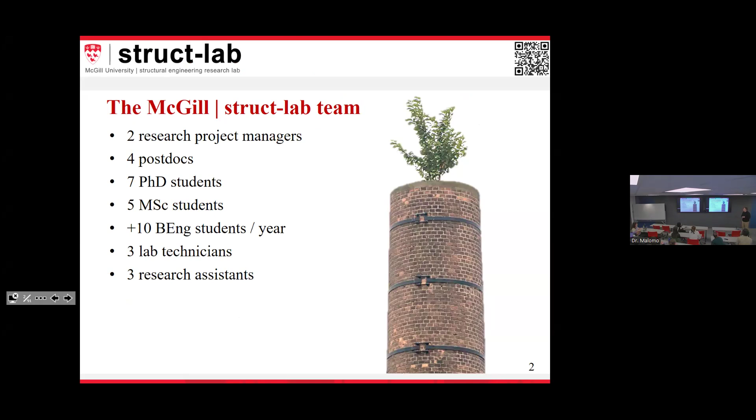Now it does work. So we're a big lab, a big team. There are a number of postdocs and PhD students that help me out. We are right there in Macdonald Engineering. It's quite a big lab. And we do a lot of things that are very practical, so mostly experimental. We do some numerical things. And really most of our research revolves, well, as my students say, we have asked money to everyone. And so our projects are pretty expensive, very applied, if you want.

And what we do essentially is we work a lot on existing buildings and on climate change adapted solutions for designing new ones. My philosophy is always, if you build a building today, tomorrow it is an existing building. So it's really a problem that relates back to preservation engineering, as I would like to call it. We are focusing on different materials from a structural engineering viewpoint: masonry, concrete, timber, steel, you name it. Our specialization is mostly masonry, and Montreal in general is great for that. I'm European, I'm from Italy originally, so masonry has always been my main interest. And Eastern Canada, we'll see, is an interesting place for that.

We do a bunch of tests, mechanical, environmental. The main goal is to try and preserve buildings that already exist, to reuse them, and we will go through a few numbers, that is one way of making them sustainable as well. It's a big word, but still. So building preservation, reuse, and climate adaptation are the keywords of this presentation.

I will go through a little bit of background because most of you are maybe not familiar with the terms and things that we do. And I would like to make the link with climate change and sustainability as well, which is not that obvious if you're not in the field. And then I'll show you a few projects with a few destructions, explosions, and cracks, I promise. So in the main domain of structural engineering, we also do seismic, which is a subfield. So anything that pertains to repair and retrofit is of interest to us.

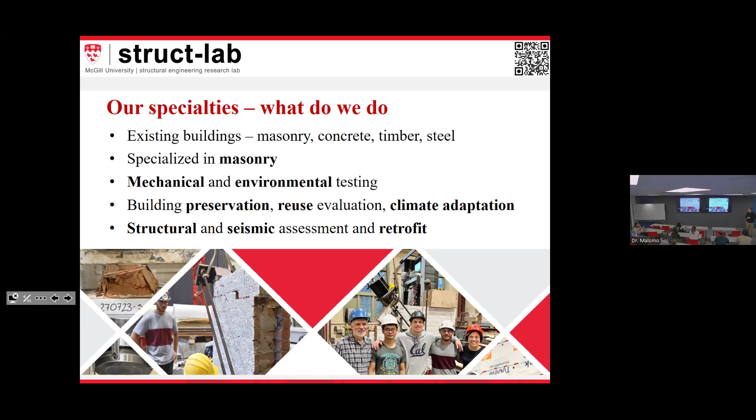So just a few figures. I mean, you're much more expert than I am in terms of statistics and numbers like this. Usually we say that 40% of the GHG emissions are due to the built environment, or at least related to construction. In Canada, we have a problem with climate change. I'm not the first one to tell you that for sure. But in general, from my perspective, it's the warmer temperatures and the altered rainfall that cause most of the issues that I'm trying to address. And of course, when you jump from snow to water, then you have all sorts of problems in buildings.

And in general, this leads to certain consequences for the built environment, in the sense that you have a building that deteriorates faster because initially it has been built for addressing different environmental conditions. So climate changes, but then buildings change as well, and it's not always a good match. And in general, the built environment is one of the most critical sectors for climate change. That's for sure, and it's going to cost a lot of money in the next few years.

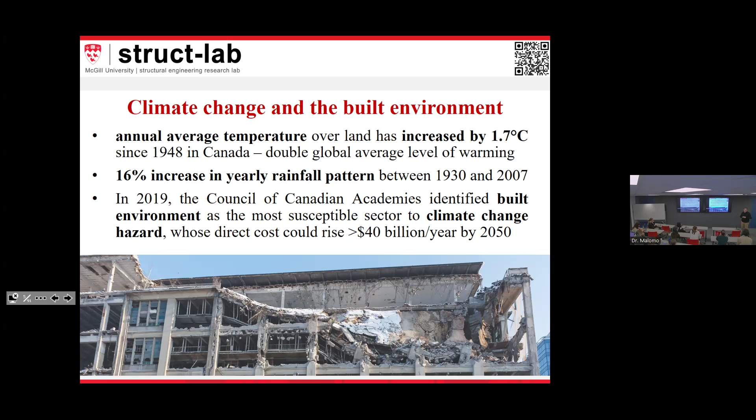Anyway, this is some of the background, and we have mentioned some of the issues. People in governments and groups try to address those issues sometimes as fast as possible, which is not always the best thing to do. So you may have heard and you may have seen in Montreal as well a lot of mass timber, a lot of solutions, prefabrication. I have my own ideas on that, and I'll share those with you later.

But in general, just to give you a few examples, the National Building Code of Canada, especially the one that is focused on energy, is increasingly setting higher standards for sustainability, which is good. Don't get me wrong, but if it's rushed as a response, you risk finding yourself using what are called advanced materials, so very expensive, very hard to fabricate, very costly, and seldom affordable as a solution.

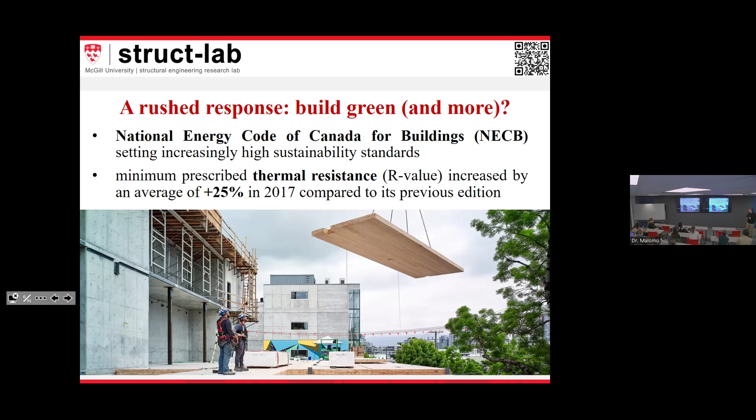An example, again, on very practical stuff. If you look at the national housing strategy, which has been released right before Trudeau ended his mandate. This is very fresh, 2025, really. So we all know that we have a housing problem. And the one main problem in terms of housing is that we need to build more. At least this is one of the solutions that is out there. Nothing in the strategy that has been presented addresses building reuse, and that was very concerning to me.

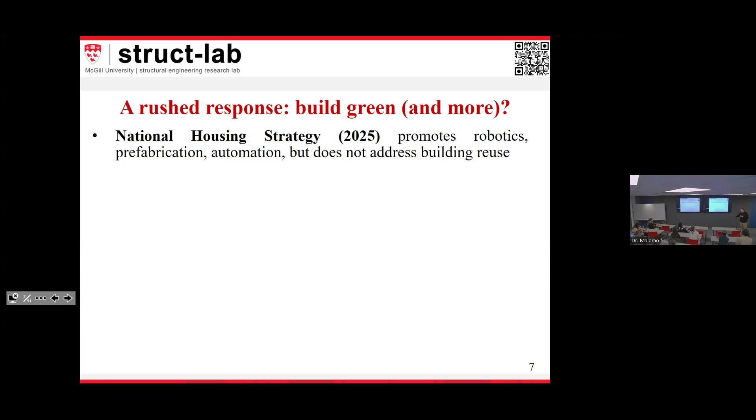But if you look at the solutions, the rushed response that has been put out there, one of the main key points was to use prefabricated homes, so homes that are easy to fabricate, modular, and so on and so forth. This is not really new, so it's history that goes in circles. So whenever you have a rushed response to try and build green, then you may end up with problems. That's my thought on that.

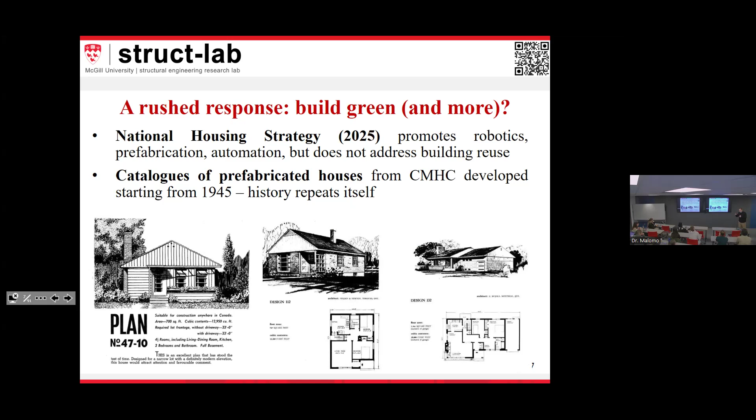And if you look at this drawing, this is 1940 or something. CMHC, Canada Mortgage and Housing Corporation, came up with these solutions 70 years ago. So it seems like we're going in circles. At least in my sector, this is the feeling that I have. Whenever you look at building reuse, it's going to take a little more time. But in the long term, you're going to get it back. You're going to be more towards carbon, I wouldn't say carbon neutral, but definitely carbon conscious.

In general, I like to think about existing, something that is already there, as the greenest solution ever. And it's not just me; the data back that up. This is a famous line from Carl Elefante, an architect, a few years ago. And that is why we're so interested in this. These buildings that are already there, they've been winning the challenges of time. So there must be a reason why they're still standing, right?

Truth is, it's not so simple to try and refurbish them, renovate them, and reuse. Most of them, especially seismically, are not necessarily up to code. So that's definitely a problem. So to me, there is always a conflict. As an engineer, as a preservation engineer, I would like to keep them. And this is what we do as researchers, to try and bridge the gap. But there are problems, issues, and barriers to that.

Changing climate changes buildings. Of course, you need to put things up to code and adapt continuously to the local climate that you have. And then there's this major barrier. The National Building Code is what governs the way we build. And if you change the use of a given building, or if you do a major renovation, this building needs to perform like a new one. Okay, so that is one major barrier.

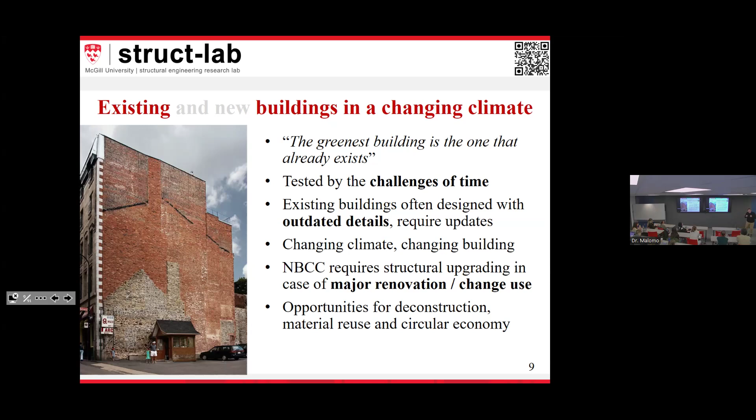or deconstruct. You might not know, but bricks nowadays, and we have a lot in Montreal and in Eastern Canada, whenever they're deconstructed, either go in the landfill or are crushed, and we make tennis courts with that color. There are not a lot of tennis courts around, so most of those go into the landfill. So some of our work looks at reusing this material and trying to decrease our carbon footprint.

Everything that we do needs to be affordable, otherwise nobody will use it. And that is one of my main arguments, right? If you want to have an impact, and you want to have it sooner rather than later, you need to make something that people can actually use. Otherwise everyone could use aerogel or whatever, very high performance, high cost things to improve building performance.

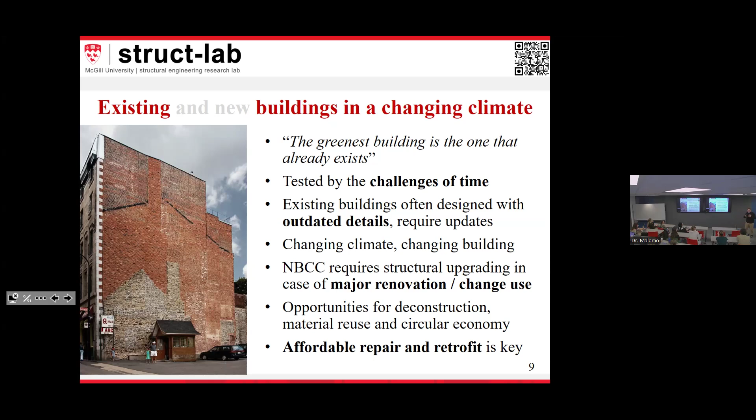For new buildings, and this is the other part of our research, of course, you need to design for the climate that you have locally. A solution that performs very well in Europe might not perform at all here in Quebec or in other regions, right? So every approach needs to be local enough. And if that's something we believe in, we need to understand the environmental context, but also what kind of materials are available here. Timber here is different from timber on the West Coast, for sure.

So again, we need to adapt to the local climate. One of the things we will see together in this presentation is that insulation, especially passive insulation, is, at least from our perspective, the key. We'll see why, but in general, use low cost ways to augment the thermal performance of your building. Whenever you have a local context, using local materials will decrease your carbon footprint dramatically, right? And there are ways of doing that, and we're not even talking about crazy things. So there are ways of building locally,

right? So low cost versus advanced. That's the battle that I'm conducting. Low cost means that your solution needs to be engineered, needs to be tested, and it's a longer process. Advanced is easier because you're generally using higher performance material. It's unfortunately not very affordable. Construct to deconstruct, that is another thing we're looking at. Whenever you're constructing a new building, you need to realize that one day that building will need to be deconstructed.

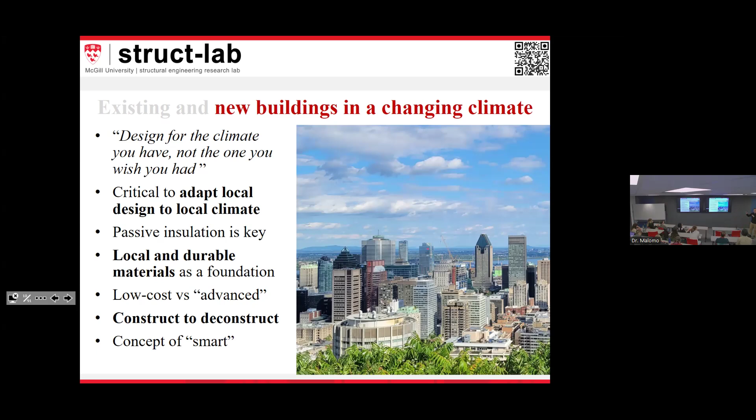Our research is based on things that are a little bit more traditional, and this is my dilemma as a structural engineer. If you think about a building that already exists, and you would like to keep it or adapt it to climate change and to new natural or man-made hazards, there is always this dichotomy, this duality; it's really an internal struggle. If I want to extend the lifespan of my building, it's great from a lot of perspectives, but essentially, from my perspective, I'm increasing its lifespan. Hence, I'm increasing its risk of being exposed to threats.

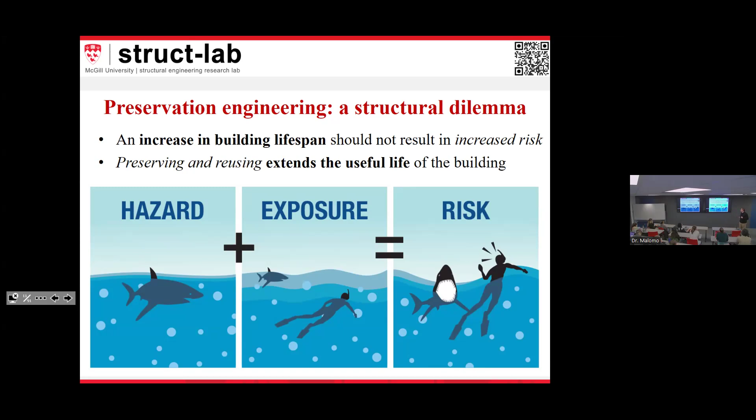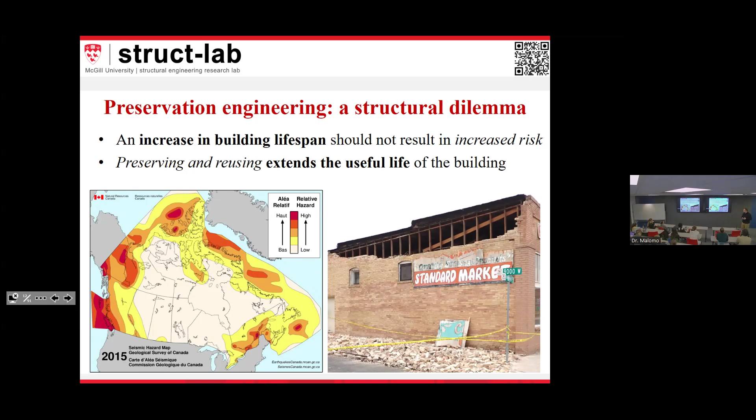Right, so an existing building undergoing major renovations must perform as a new one, which is one of the current barriers to climate change adaptation and preservation. Most of our norms, everything that pertains to provincial codes or national building codes, are conceived for new buildings. There are about 12 pages in the National Building Code on existing buildings, so there is very little. There is a lack of engineering guidelines: there are none in Canada. There are guidelines in the US, in Europe and in other countries, but those buildings are different from ours, right? So part of our research is to foster collaboration with industry and get those standards done for our buildings right here, with our climate.

And the same applies to building adaptation. We have been talking about the lifespan of a building, 50 years, 100 years, and so on. There is the perception that materials are durable to infinity, that they will never perish. They will. And so maintenance is another very important thing. Most of our engineers, even if they will never admit it, have very little knowledge of what's going on in existing buildings. There is a lack of knowledge in terms of the materials themselves and how they would behave.

Most of our engineers rely on material testing data obtained in Europe, in New Zealand, in the US. So it's different, and our assessment is flawed. They end up using very conservative values for those assessments. The more conservative your structural assessment, the more material you will use for retrofitting, right? I'll talk about knowledge factors later on, but that's what it is.

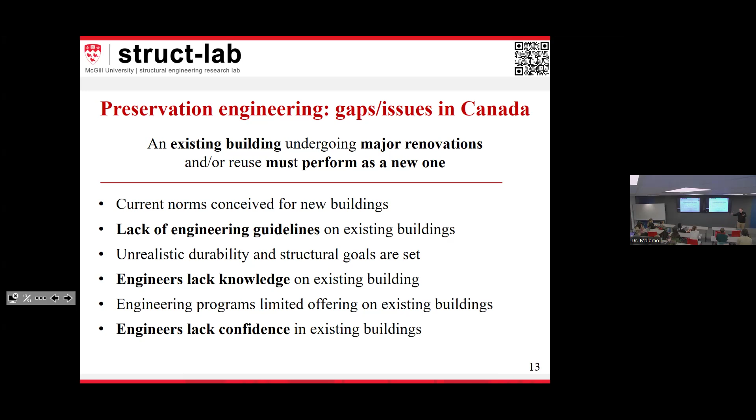When engineers lack confidence, they end up overshooting and over-designing. So it always gets back to the knowledge factor. The less we know, the more we are scared, and the more we over-design things. The more we over-design, the more material we end up using, the more demolitions we're going to perform. And this is more or less what happens.

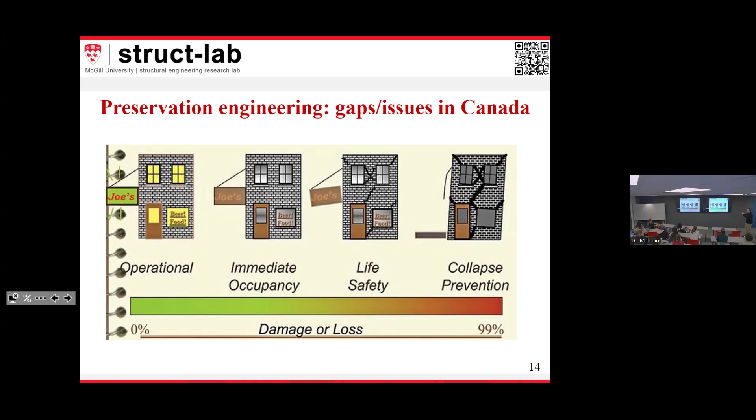I'll give you a few examples. But this is how a structural engineering mind works, and this is what I like about US guidelines for existing buildings. Whenever we design a building, we know the materials that we're using, but if you encounter an existing one, you don't know what's going on. If you don't do testing, if you don't know your construction details, you need to overshoot your design. For instance, if you don't do testing, you need to decrease the mechanical properties of that specific material by 25%. So the less you know, the more you'll overshoot, and the more material and more carbon footprint you'll have.

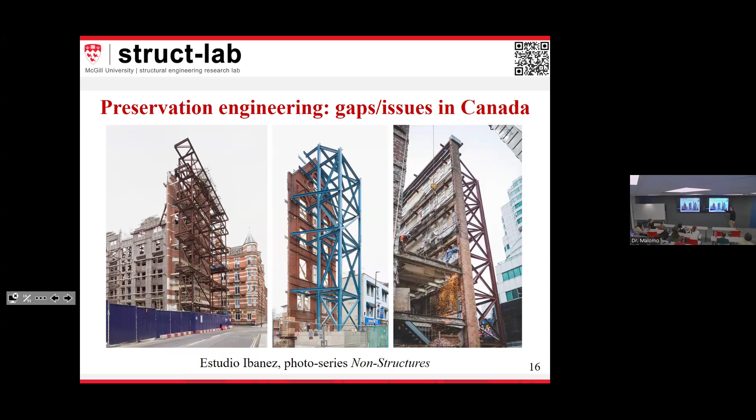Another example in Montreal, again in the Plateau area, between Saint-Denis and Mont-Royal. This is 2018, and I lived right across the street, so I made some of these photos, and this was a really interesting case study for me. This is a typical triplex in Montreal: stone outside, wood inside, very typical. There was a commercial place here, and residential on the upper stories. In these 3 years, nothing really changed, apart from the fact that this commercial shop was closed.

And so they decided to renovate the place, or at least change its use, probably because the shop had closed. What they did, you will see, is they demolished everything that was inside and just left the shell. That was because the city of Montreal really dictates to maintain the facade. So then there is another question.

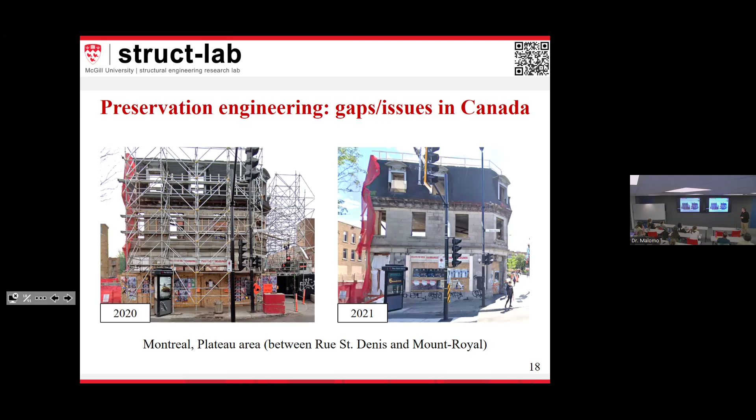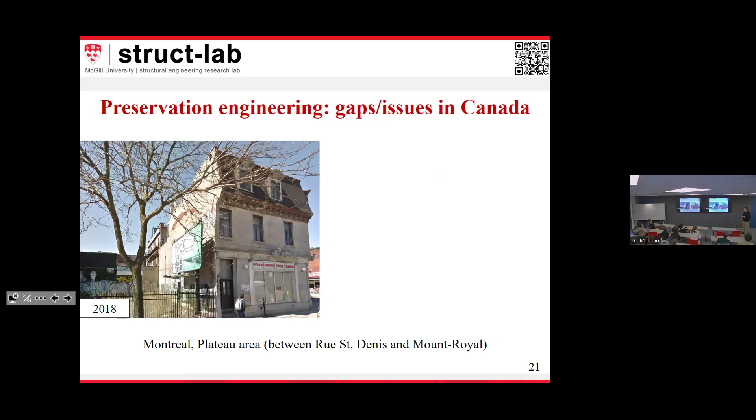So I'll show you what's going on inside, right? And this is a surprise if you don't know what's going on. So this was the previous state, nice masonry walls and so on and so forth. And they demolished everything inside. This is one side of it. Other side, same thing, right? There was really just the shell outside. But then they came up with this system, which was basically a reinforced concrete building inside the old building.

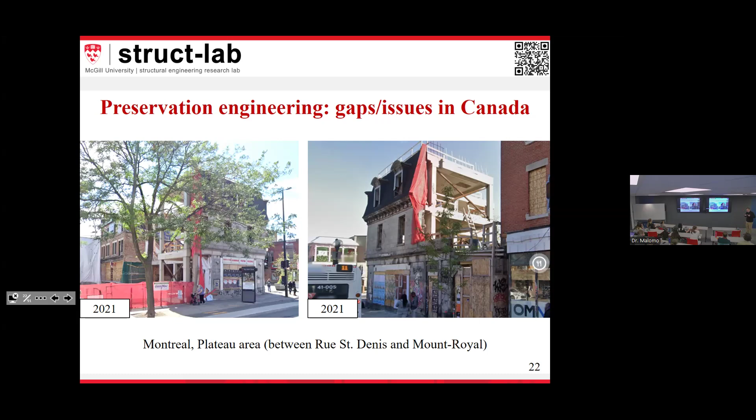So this to me is a clear demonstration of an engineer or an architect who has designed this. They didn't trust the original system, the original floors, the original columns, the original posts. So they didn't know really what was going on, and so they decided to just get rid of it and build new, right? Lack of knowledge. This is one of the main reasons why this happens. And it happens a lot. And there's a lot of discussion on how to address this, not only in Canada. Globally, this is a big problem.

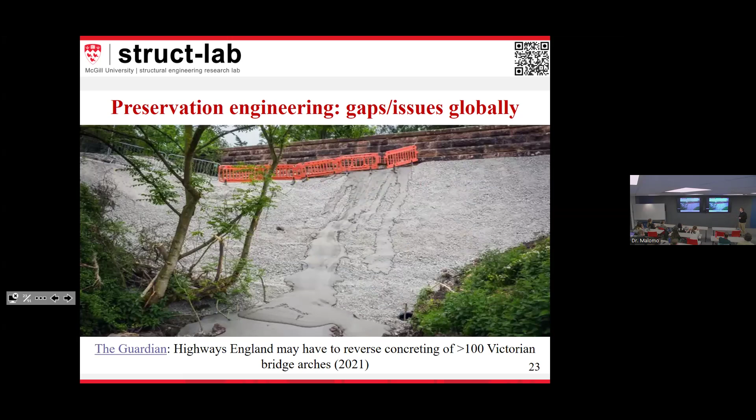This is something that makes me laugh a lot. I mean, it's a little bit sad, but still. Imagine you're intervening on hundreds of bridges. This is in the UK with concrete, right? And then you had to reverse the intervention. So imagine how much material you have wasted, and imagine how much time you have wasted. Lots of money. So this is just an example, but there are others.

So if you look at what's going on in Montreal or in Canada, Eastern Canada is very special. We live in Montreal, so we know that our buildings oftentimes are older than others, especially in other regions. If you look at our building stock, Quebec, Ontario, where most of the population is nationally, 60% of those have been built before 1980, which means that most of them are reaching their nominal lifespan, right? So we have quite an old building stock. Most of those are residential.

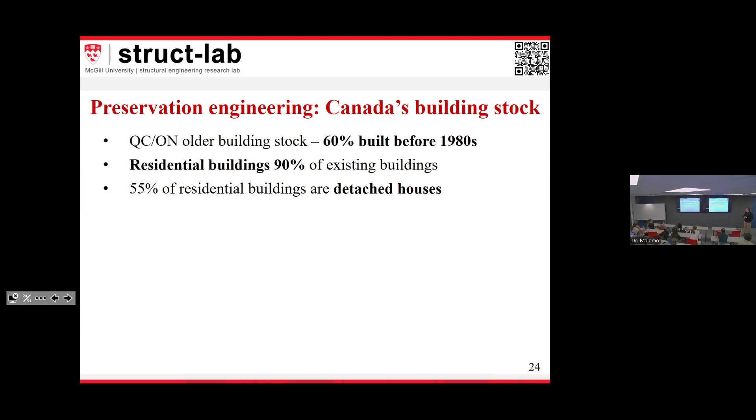So most of those are residential, and we will see that thermal efficiency is going to be a big problem sustainability-wise, and even from a climate change adaptation standpoint. Most of those are detached houses. We want space, and that is why most of our houses are detached houses. And most of those have materials that we thought were invincible.

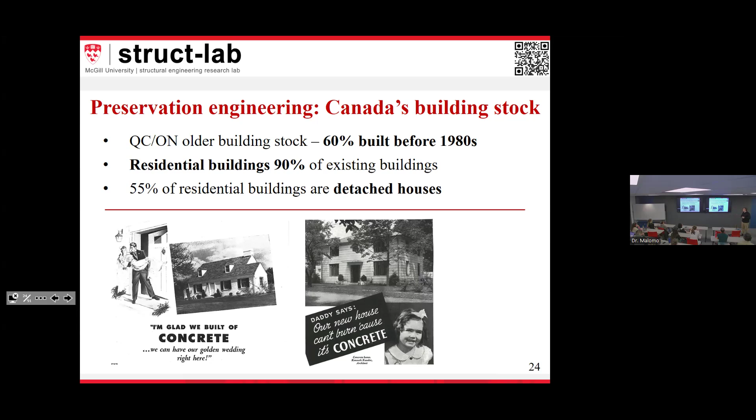So these are some advertisements for concrete, right? We thought the concrete would last forever. Instead, unfortunately, the rebars corrode, cracking happens. And so unfortunately, all our foundations will crack at some point. And other things pertaining to the Canadian building stock, just a few figures.

So in general, if you look at residential buildings, space heating is the one that has the largest amount of GHG emissions. So that is really one of the problems. That is why I said before, passive insulation from a climate change sustainability perspective is key. And since that's the key, you would like your envelope not to crack, or at least to crack the least, so everything is tied, mechanical damage to thermal efficiency.

So in general, whenever you want to start and reuse a building, there are a lot of challenges. We've mentioned some of those. The way we think about reusing and making an impact in the next, say, 10 to 20 years, because we don't have a lot of time, right? Most of our agencies would like to have high-risk research being performed, fine. But if you want to make an impact at the regional scale, you need to identify clusters of buildings that will give you the better gain in the shortest period.

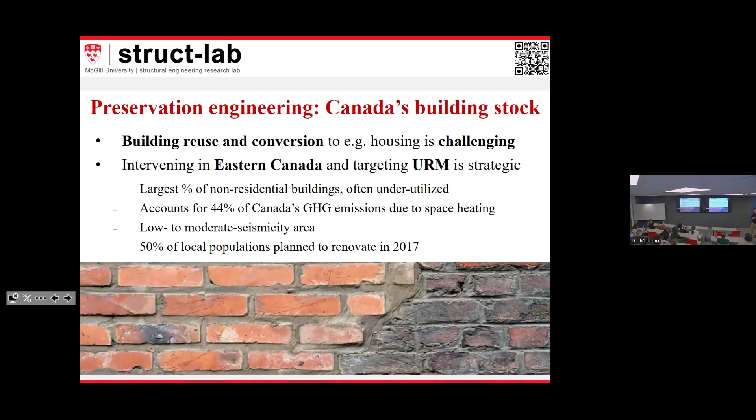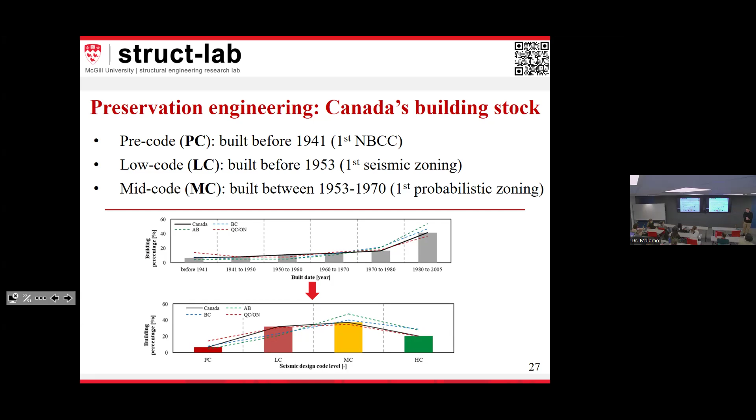Modern. All those other buildings, pre-code, low code, are buildings that may have problems if a natural hazard, in this case earthquakes, comes. So there is quite a lot of that. And if you look at these trend lines, Quebec and Ontario are struggling a bit; of course, they have the older building stock. So it's a localized problem in certain regions. My philosophy is you try to address that first for high impact in a shorter time span.

So this is us having fun in buildings. Of course, you want to start with gathering the knowledge. And in Eastern Canada, or in Canada in general, virtually nothing is being done. We don't know our masonry, how it performs. We don't know our timber, what its properties are. We take everything from abroad, most of it.

So what we do, me and my research group, we literally go into buildings and take samples out. We bring those to our lab and we try to characterize them environmentally, meaning the thermal properties, the porosity, all those properties that link back to their environmental performance, and also structurally, how much load they can take in all directions, and so on. Here I'm showing masonry, but we also have some cool stuff about timber.

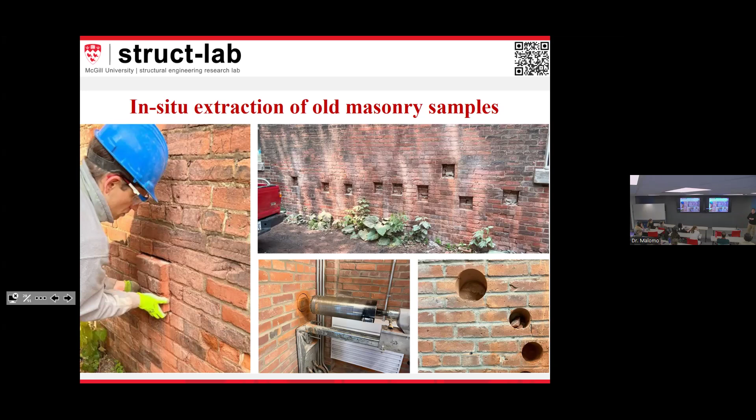These are all buildings owned by the city of Montreal, and they're very proactive and supportive in letting us access those buildings, which is great. The beauty of focusing on Montreal is that it has historically been a port of entry for most of our construction materials, initially from the UK and Europe in general. Most of the stones and bricks, if not produced here, came from those countries, and most of the material in Eastern Canada originally came through here. So if you start here, you have a good overview of what's going on.

So I was saying we crush stuff, we destroy stuff. We start from very small things, and by the way, you will probably know some of the buildings these samples have been taken from. Compressive testing: this is mortar, this is stone, and these are masonry assemblies. We call them triplets because there are 3 bricks. So this is the knowledge phase, gathering knowledge of these materials. We also do a lot of freeze and thaw damage testing.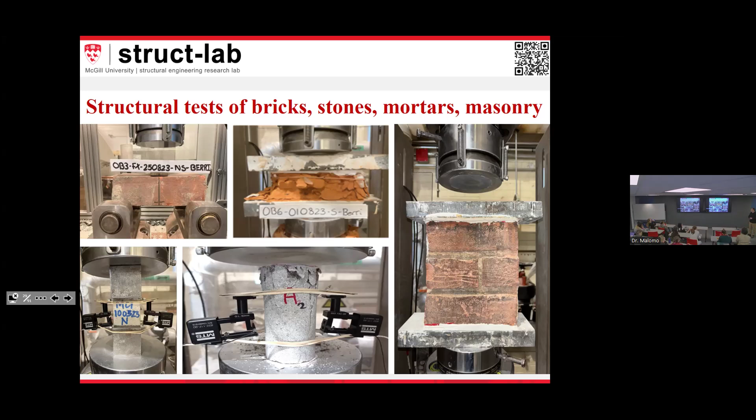We leave them there, and then we perform 50 cycles of freeze and thaw, which if you think about the lifespan of this brick is nothing. Imagine how many freeze and thaw they have. But being saturated, being full of water, you test them. It's super harsh as a test. So if you look at this standard, it's written explicitly, do not use for used bricks.

But there are no other standards for used bricks, right? So this is a big barrier for deconstruction, reuse, and so on and so forth. This brick will hardly pulverize like this because when it's in a wall, only the face, the outer shell, is actually wet. So this is one barrier.

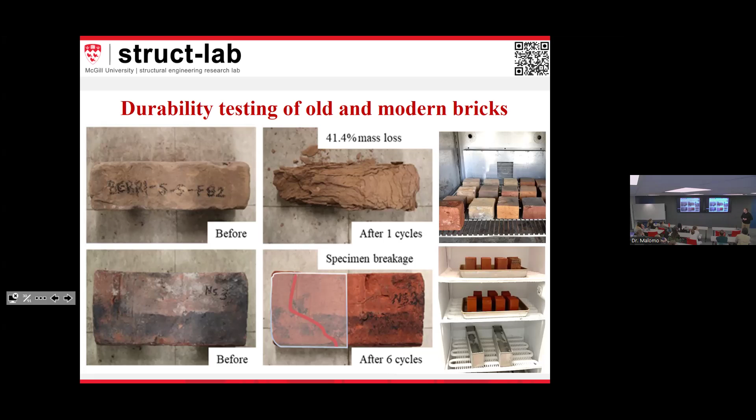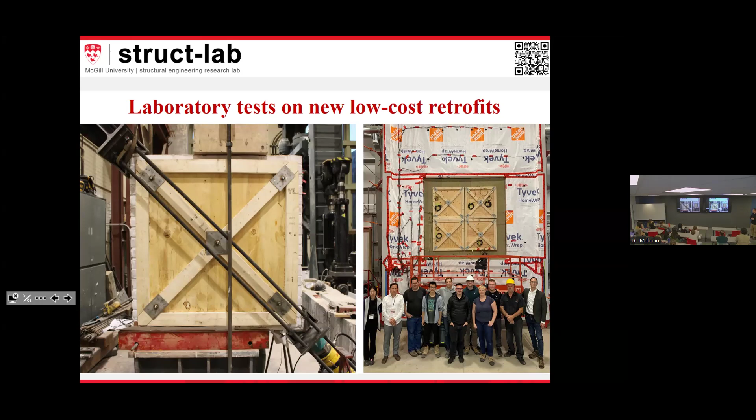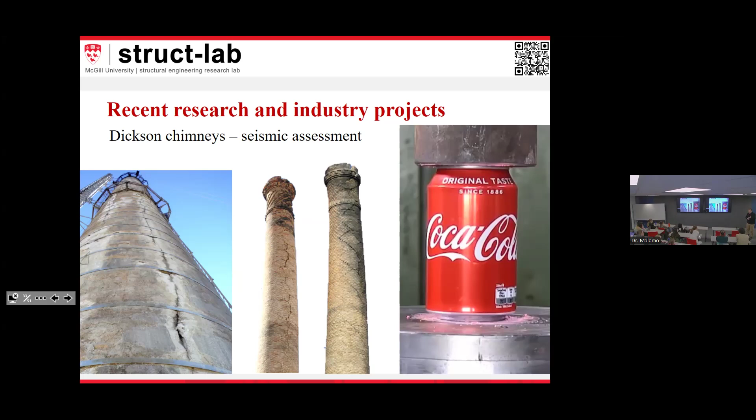So we have been working with the city to find solutions for this. What we've been finding out is that seismically, this seemed to be in pretty good shape, notwithstanding the crack. And you learn that by being on site and by doing your analysis and so on and so forth. It was a lot of fun. And we're collaborating very well with the city.

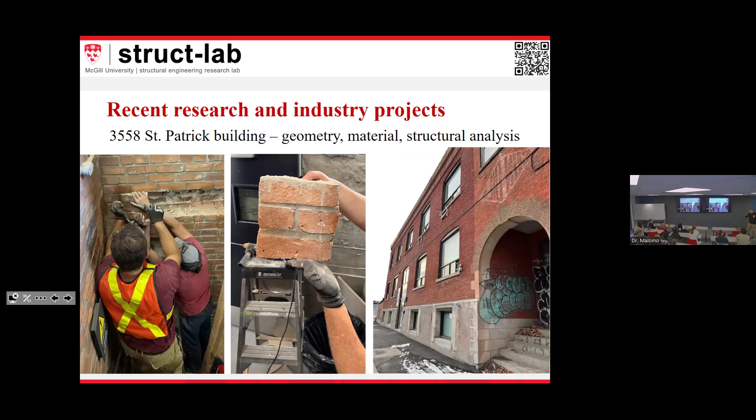This is another city-owned building in Rue St. Patrick. This is presently used for storing the vehicles that remove snow. There is a group of people that manage those. So we went there. We're trying to extract samples, got the full point cloud of the building, and try to understand what the geometry was, and test them in our lab, right? So a lot of samples.

Sometimes I feel like Indiana Jones. You go on site, you take a lot of samples, and it's a lot of fun. But it's super important because these data don't exist, and if they don't exist, whenever you assess a building, it's very difficult to proceed. And this also pertains to the new buildings. Now, whenever you build, for instance, an extension of an existing building, you really need to make sure that the material that you're using is compatible with the old one, right?

Otherwise, if you end up being too stiff, or less durable, then you have something that is not compatible. Something will crack here and there. So if you don't know what's going on with the older building, hardly can you manage to have buildings that are adapting to the changing climate and to the changing world we live in. Right? Example of things that have crushed. Surprisingly, these assemblies did perform very well, even though this is a 1914 building, right?

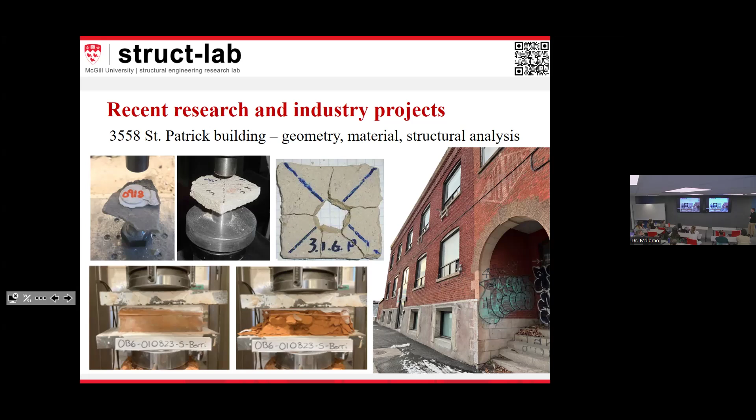And we do this with everything, with mortar. This is just bricks and mortar, but there is more, timber and so on and so forth. And then when you study these buildings that are right there, the beauty of it is that you can sort of get the geometry, get the characterization, and reconstruct the samples in your lab, right? Which is what we're doing right now in the Jamieson Structures lab. This is a 3 meter by 2.5 meter wall, so it's actually very big, right? And we've had masons from the city coming into our lab and constructing them.

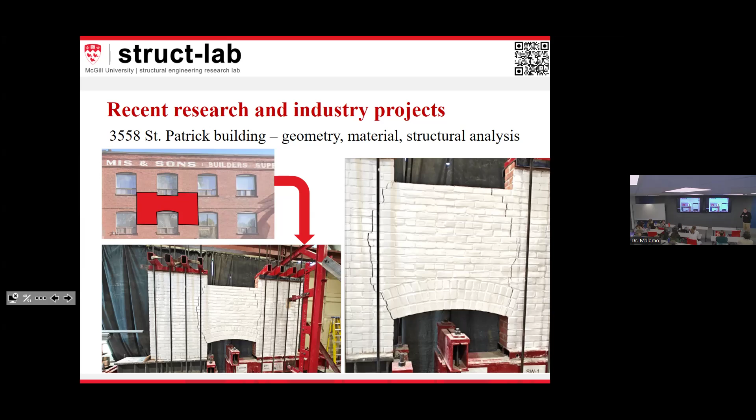So we had to select bricks that were compatible with the existing one, mortar that was compatible with the existing one. We needed to add to the mortar almost 20% of sand to make it weaker, and it was still much stronger than the existing one. I'll show you a few things. That's another problem. Modern materials, they're too strong for the older ones. So compatibility is always an issue. Right? So these are some of the walls, and it's basically this portion of the building that we are replicating. And we have many of those. So it's a big effort, and everything revolves around the knowledge.

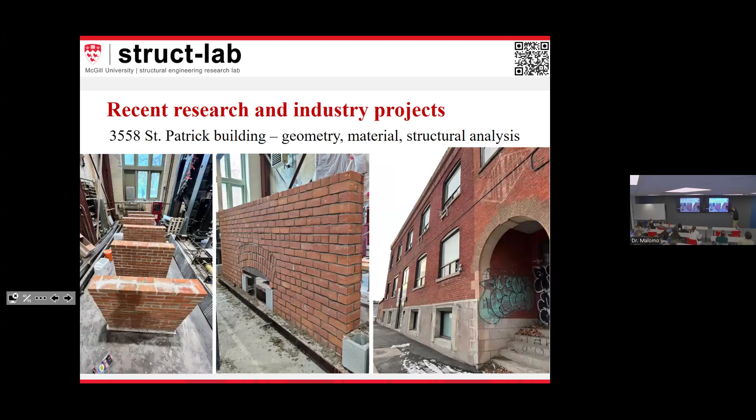We're now doing this with the big walls to try and understand what would be the pattern of damage that you would get from a settlement in Montreal. It's important because if you crack the envelope, then thermally this building becomes inefficient. But it's better if you know what kind of damage you do expect from these actions.

Other examples, you might know this building. This is right under the Jacques Cartier Bridge. It's a pumping station. It's called the Craig Pumping Station. So all these stones, this is an 1887 building, one of the first ones, or at least the last ones that we have from that era. This stone is very important in Montreal. It's called Montreal Grey Stone, and it's everywhere, including our campus. That's the Montreal Grey Stone. It's a historical type of stone that here we have been using for everything.

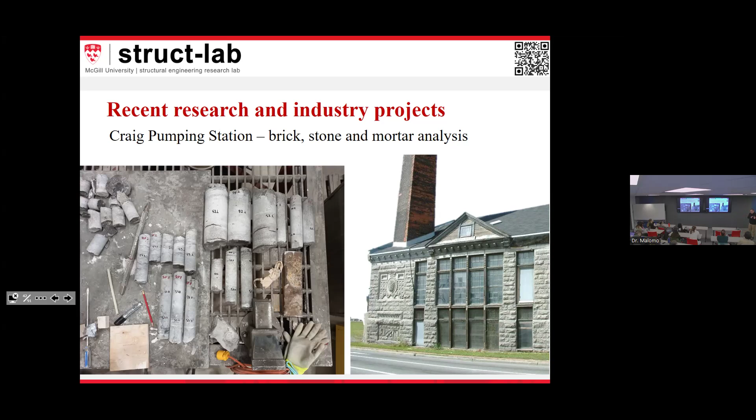So my point is, if you try and characterize this, and you know that it's coming from the same quarries, right? These results will be valid for many other buildings, chances are, in Montreal. So again, you've got to be selective with what you do in your studies. And we did all sorts of tests to measure the tensile strength, the compressive strength, and so on and so forth.

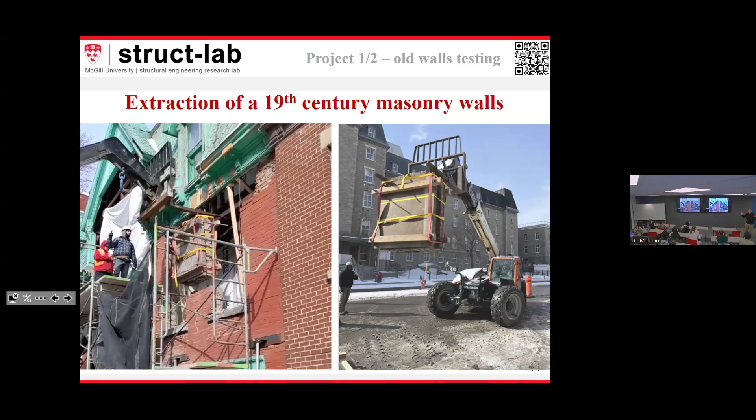So most of these bricks, what happens in Montreal every day, whenever you disassemble this facade, you're allowed to reuse those bricks for the same facade. So it's very important to us to try and understand what are the conditions of the actual materials, to tell the contractor, to tell the engineer, yes, you can do it, more or less, you would be approaching the thresholds for the code.

So for this first project, and I'll try to give you an overview of what's going on, we focused on some of the residential buildings that we have around here, duplex, triplex. And I don't know if you ever noticed, but especially here in Montreal and Ottawa, sometimes within the brick patterns, you have some timber elements inside. So people have been using this for attaching window frames or coats or something like that.

It's actually a unique feature that no other buildings have in North America, and it makes these walls perform much better seismically, because there is a sliding plane. And so not knowing this, you would not know that these walls would have such a high deformation capacity. So that's why we extracted these walls. These were part of the extracted walls, right?

And they do that on purpose, or is that just? No, it's aesthetic. I mean, they do that especially when you have window frames. It's much easier if you have these sort of beams of timber, right? So you can attach your frame directly. And sometimes they use this also. There was such an abundance of timber back in the days. In my office I have one. There are timber bricks. They would just put them there. Why not? There's a lot of timber, right?

And also, there's this joke, right? On Friday, right at the end of the weekday, you will see your bricks coming a little bit wavy because the mason wants to go home. So they used to use these timber beams, which are really long. Imagine a wall from here to there. So every Friday they would put a timber beam to make sure that it would be straight. And it's actually what happened.

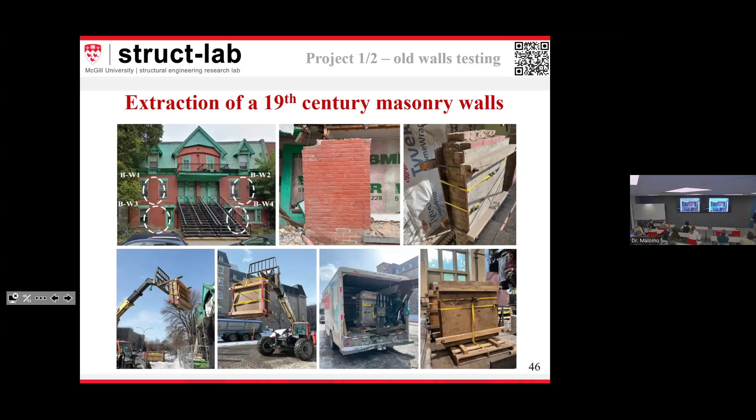And sometimes you have this in buildings. I'll show you a few images, but they are everywhere. So yes, it's very practical, right? But if you don't know the history, then it's hard for you to make sense of it. It makes sense. It's a Friday. They were tired. So these are some of the walls that we got.

Even from a practical perspective, you see there are one brick, two bricks. This is the load-bearing part, and this is the veneer. So they were trying to have as many leaves as possible to try and contrast the cold, which makes sense. Nowadays we always have a cavity here, right? The insulation. Back in the days, they didn't have that.

So what is cool about this? These bricks are much stronger than the ones that bear the load because inside they have silica. So when they cook these bricks, they want them to be less porous, so they are much more effective to screen against the weather. So the load-bearing ones were not necessarily excellent bricks durability-wise, but they were covered, so it makes sense.

So they are coupled with car parts. Scrap metal. So these are all metal. It can be steel, can be iron, I should say. It probably came from either machines or cars, and we find many of those, all different. It's an interesting learning process.

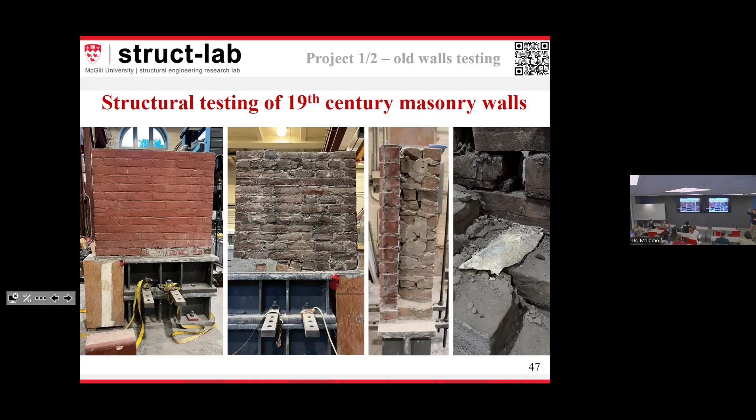So if you look at this wall, there was a timber beam right here, from this part to this part. Imagine the window was here, so it kind of makes sense that they have this anchorage point. So if you don't know this and you analyze this wall assuming it's a normal wall, you would never guess that the deformation capacity of this wall is so large. So that is why knowledge is so important.

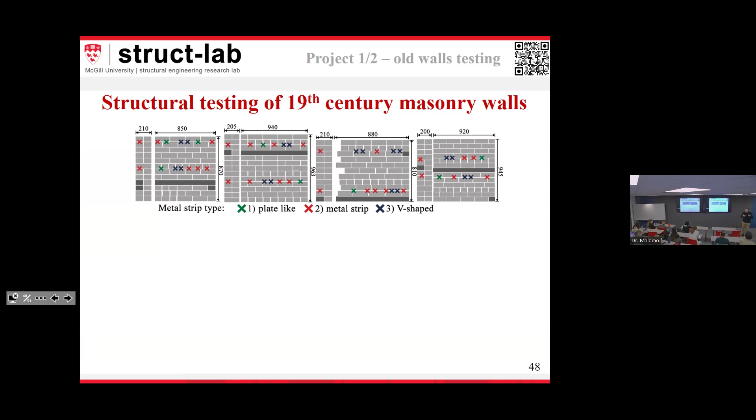Ties that we have found. Literally we had to go there with a scanner, because we couldn't disassemble the walls because we want to test them. So we went there with a scanner and non-destructively detected all these ties, all kinds of ties. A lot of variation in there. Mostly iron, which kind of makes sense. But at least they have coupled the walls. So there was an attempt to make things work in a certain way.

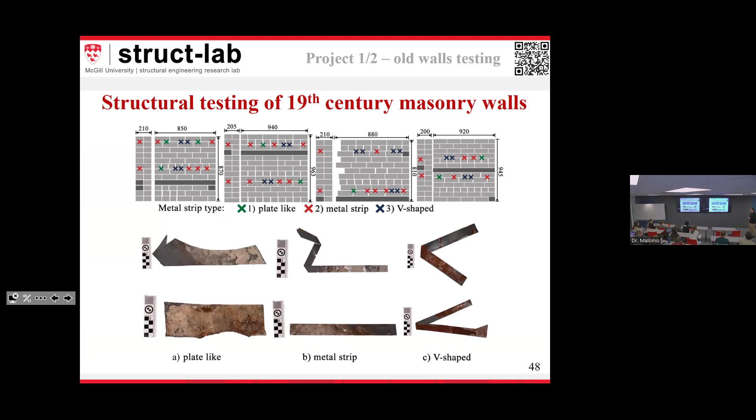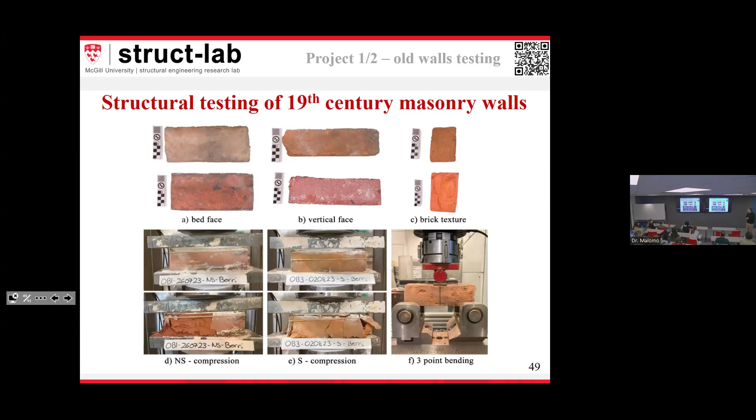The bricks. If you see the bricks, they're all curved because these were fabricated with traditional methods. Of course, we did all sorts of tests on those. It was a lot of fun. We did tests on samples, so you get the compressive strength of the assembly. Very important. And then I mentioned timber.

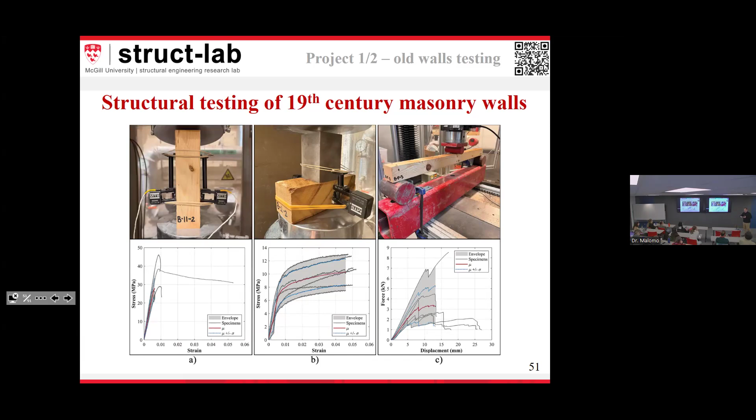So of course we had the beautiful timber that was in there. It looked very old, but whenever you cut it, you would see that inside was perfect. And this performs even better than the modern timber that we have. This is slow-growth timber. Nowadays we use accelerated growth for our timber, which structurally speaking is very bad. So excellent timber in there.

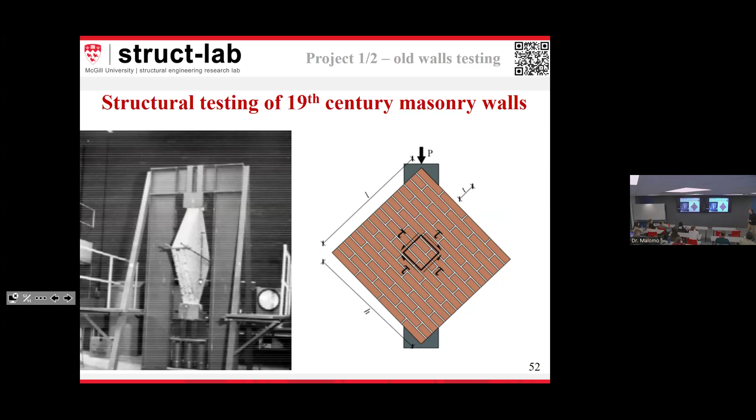In showing you the results, of course, we had to make a few adjustments. This is the standard. It helps you to crush the wall at a 45-degree incline. If we had to rotate our walls, it would have been a mess. So we had a sort of compromise, something like this. And this is a little fun, crushing this. But this is a test that we performed.

The beam is right here. And you would see that if you apply the load here, the wall starts sliding at a certain point. So it will not crack diagonally, right? It will crack in this fashion. So from a sustainability and climate change perspective, your envelope will crack less, right? And this is much more resilient than other types of walls.

Right? The cracking pattern, all the different cracking patterns, it really depends on where the beam is, right? So the beam really dictates how the wall is behaving, which is kind of interesting. So if you know that, you would be able to sort of refine your assessment.

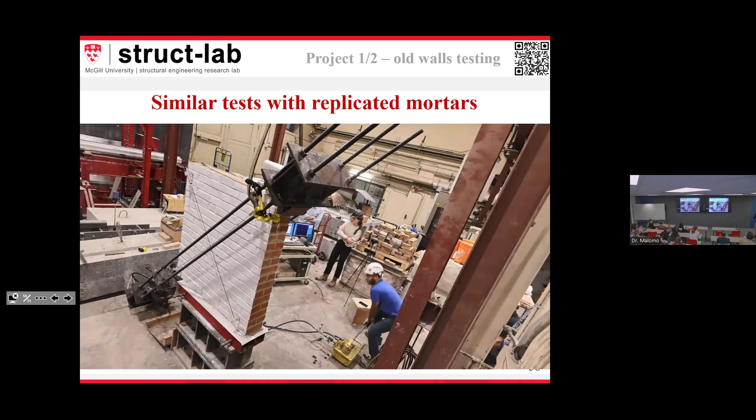So this is another test, a similar test with a replicated mortar. Okay? So I told you that these mortars are so much stronger than the old ones. So look at what happened. It's very similar, right? And then these all collapsed. So current mortars are so strong that they are explosive, no? And a big problem with respect to climate change adaptation is that unfortunately nowadays it's very hard for us to formulate materials that are compatible with the ones that we had before.

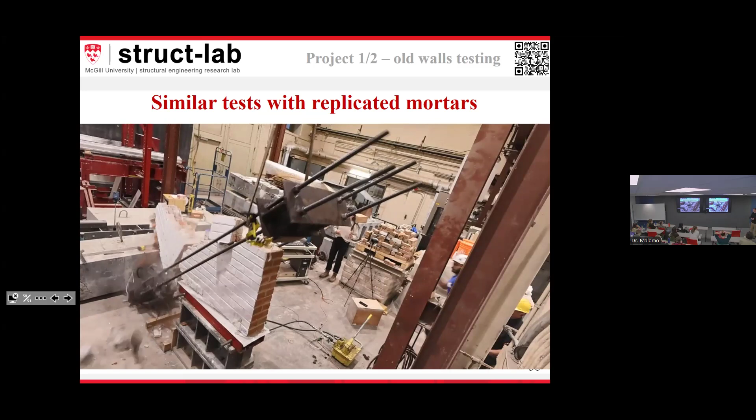So this brings me to our next project. I don't have a lot of time, but I'll try to give you an overview of what's going on. So you have seen all the characterization that we've done on those buildings. No? So we have a lot of data on how existing buildings here should behave environmentally and structurally. So we came up with an idea. How can we try and repair them in a way that is affordable, that people can actually implement these solutions? And my main concern as well, I'm going to bridge the gap from a structural perspective. I also want to bridge that gap thermally, so that it's a solution that is holistic.

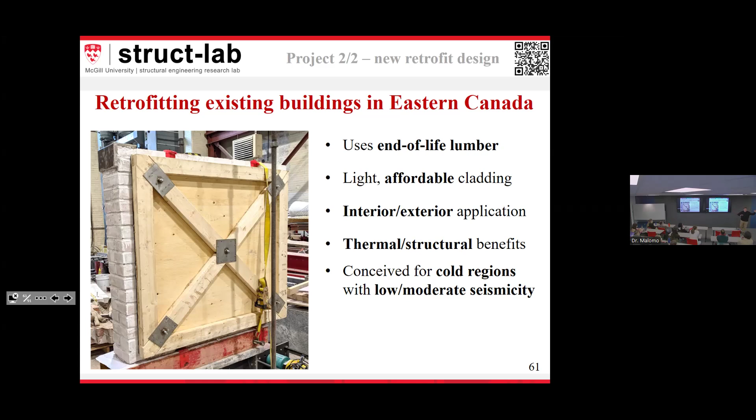So these are the solutions we came up with, the timber one, and then some grids that I'll explain in a second. For the timber panels, we have used plywood and lumber that are at the end of their life. So you can literally find them at Home Depot and in these big retail stores. It's a modular retrofit, so you actually attach it on the walls, either internally or externally. And it also has thermal benefits. It would work in Montreal, it would not work in BC, of course, because it's meant for low seismicity. This again was a big project for us, so it was a lot of work to do in just one year, two years actually.

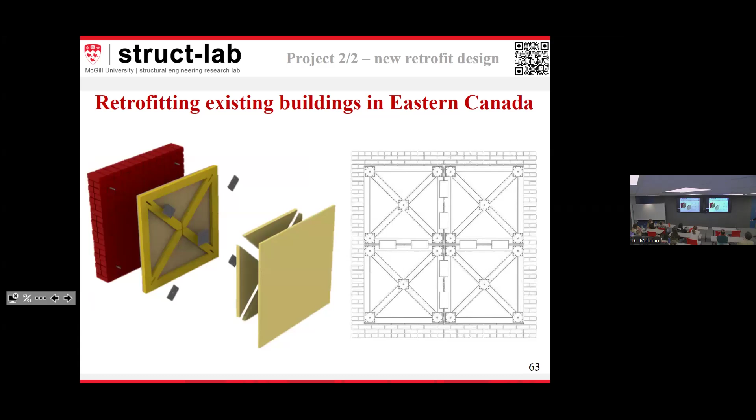This is the idea, no? So you have your timber panels, then you have insulation, and then you have your anchors, and so you can attach this locally to your wall. So of course, if you have a wall, then it's going to be covered by different panels all the way. If you have a building like the one that we have inspected, you have your grid. So you try to bring it up to code and you adapt it, environmentally and structurally. So you'll have something like this.

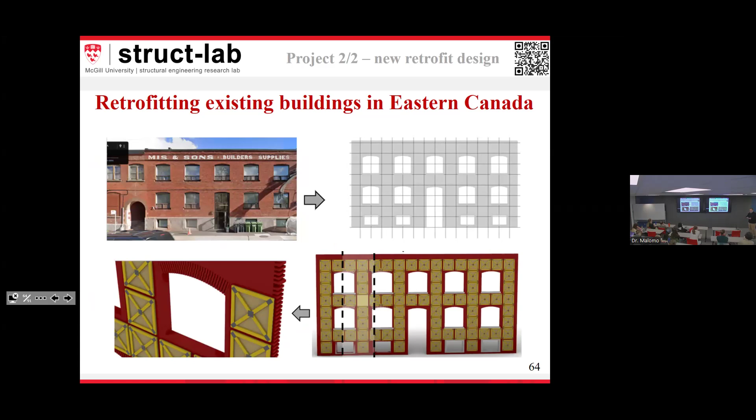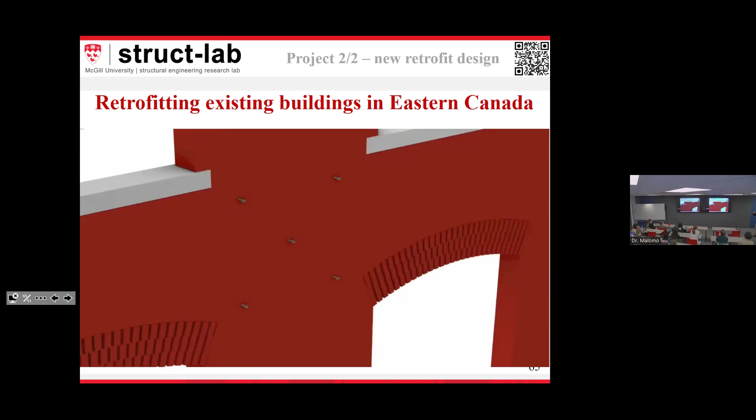Now, if it's a heritage building, you would retrofit from the inside. If it's a normal building, you may apply this and then clad it. So it doesn't solve all the problems, but it certainly helps bridging the gap between the code and the existing structure. The big takeaway from this is that if you try and make this up to code, then you will not necessarily need to demolish it, right? This is the idea. So you have these panels that are attached, and this would be the thermal layer. And then you seal it, and then apply it locally to the anchors.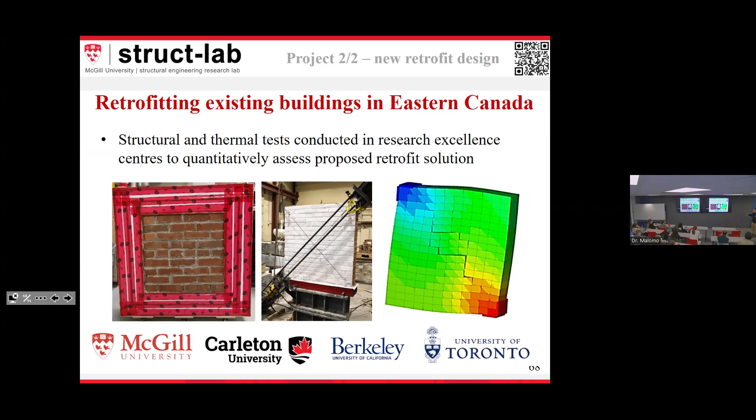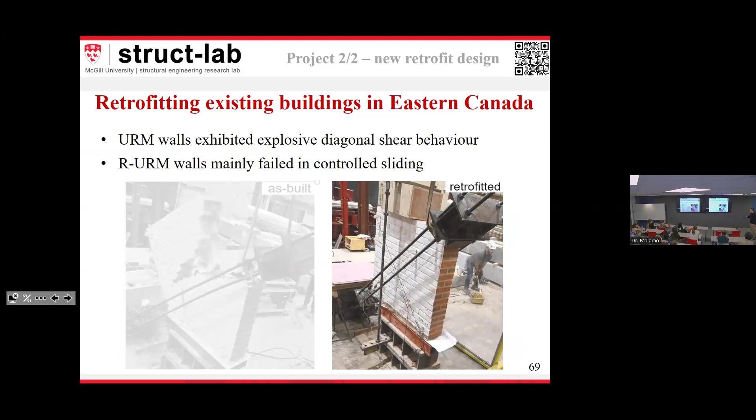So when you convey what is the effect of this retrofit structurally, the panel will be here. It's the same test as before. You remember the big collapse? So what you may not notice here is that there is a sliding at the base. So a local cracking, non-explosive, the damage is reduced. So of course, if your envelope is less cracked, it's going to be more durable throughout the years, right? So in general, the displacement: this would be the unreinforced case, this would be the reinforced case.

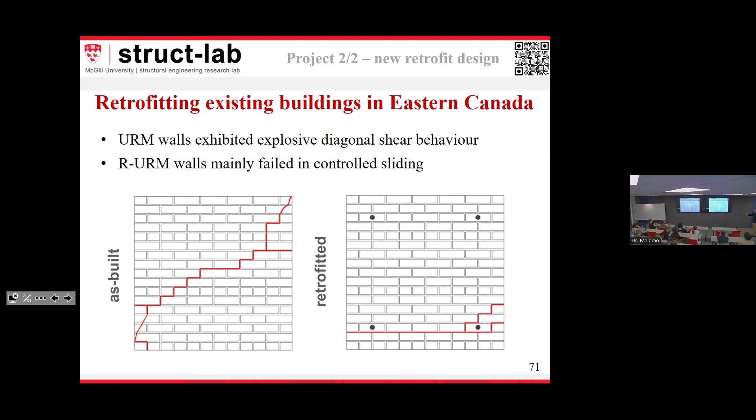So a lot of increase in terms of thermal capacity, and this would be the cracking pattern, the differences in there. So thermally speaking, the retrofit was very efficient as well. We got a 4 times increment in the R value, which is a thermal resistance. We use what is called a cool room, hot room. You have your panel in the middle, then you will be able to see what is the heat transfer in there.

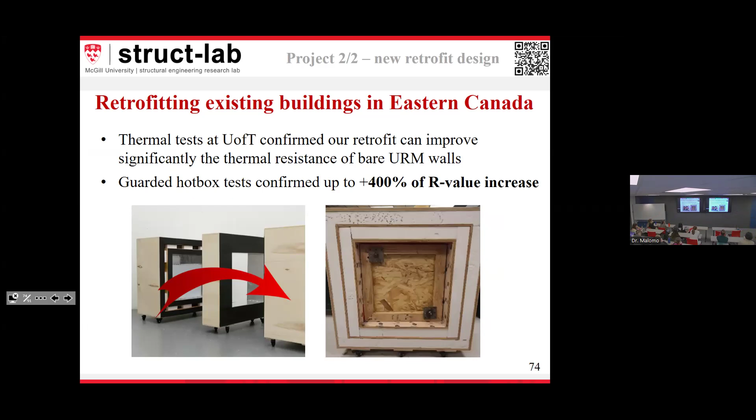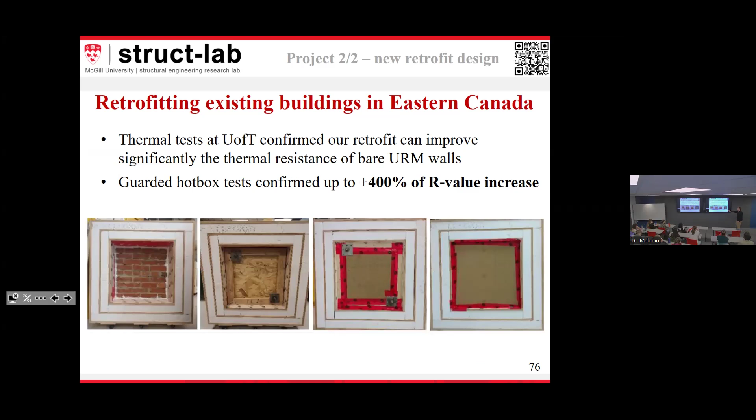So yeah, these tests were done at the University of Toronto. A lot of wires, there's not much to see. It's just a big box with the panel inside. But it was extremely good to see that the panel performed well. These are OSB panels, plywood panels on top of our masonry walls. Of course, we did a lot of simulations and so on. The big picture would be to have them applied in different locations of the building.

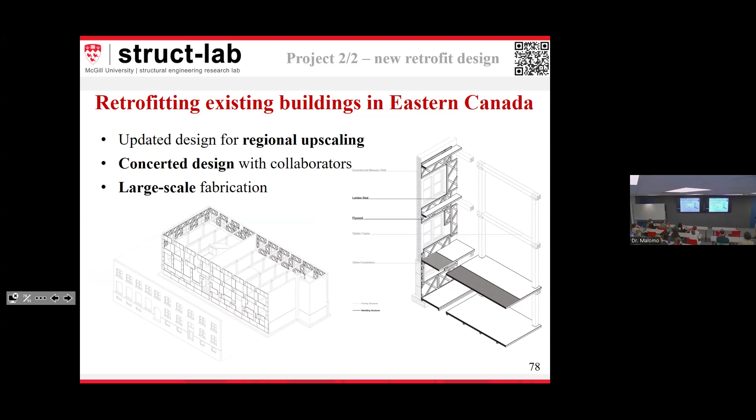Now we're currently working on the upscaling of this technique. And the design process is a complex one, so every detail is very important. Slotted gap, because of course, if you have any existing buildings, you need to make sure that you have a little bit of flexibility in mounting the panels. So it's a lot of thinking process that goes into that.

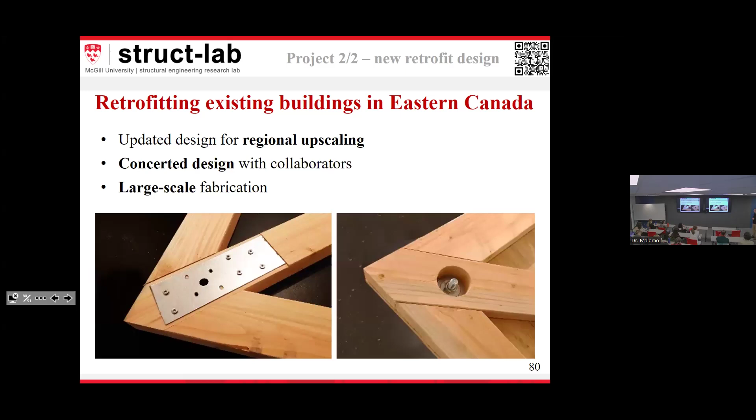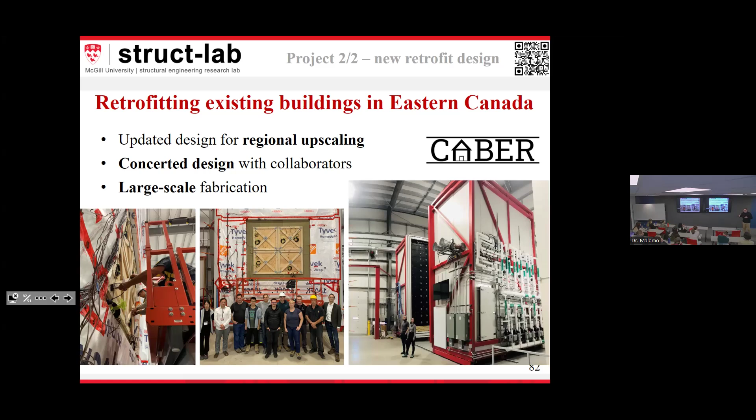Caber, I've mentioned Caber, big facility, one of the biggest in the world actually. You remember the hotbox that I showed you before? This is the biggest hotbox that there is around. So you put this panel, which would be 3 by 3 meters, inside. You spray it. We have simulated years of rain from Quebec City, trying to see how it would perform. And the same applied for the moisture. So we did all kinds of environmental tests there to see what would be the durability of it.

So not only that, there are other alternatives one can explore. Recycled plastic is one of them. Now, plastic, you say, oh my God, what's going on, right? But in general, there are some materials that are better than others that can prevent crack forming. This material in particular is used for soil containment. So our principle is, let's see if we can find in other sectors, in other fields, materials that are performing in a certain way to try and confine cracking and try to have insulation into that as well.

The interesting thing about this project is that we're using an environmental chamber, and inside the environmental chamber, we're doing the test. So of course, this could perform well in California. But what if it's exposed to minus 40? It's going to change a lot. And so we want to make sure that everything is local, because then you're adapting your solution to the current climate. Just an example: you have mortar layers, and then you have your geogrid, your wall.

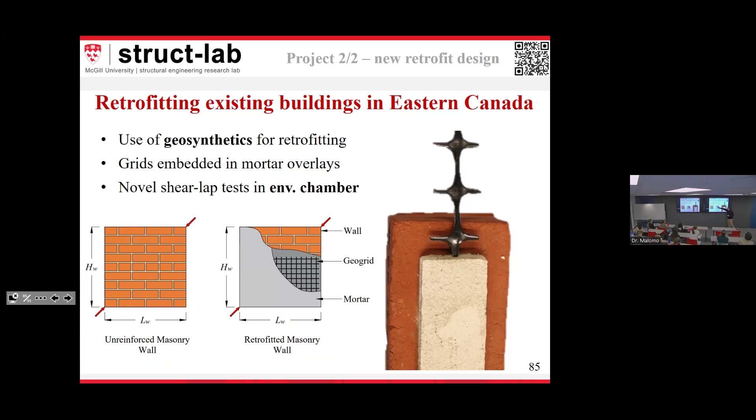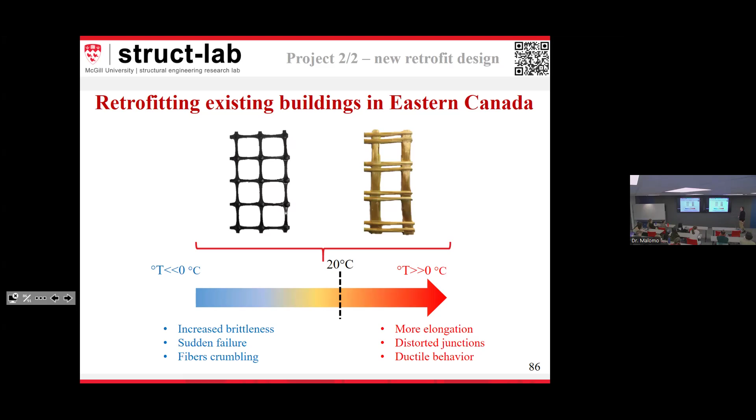So there's a lot of testing going on in a number of directions. And this is what I'm saying, it changes. This thing, which is made of plastic, will probably become more ductile whenever the heat increases. And the same applies for this, which is a fiberglass fiber. So this would be our environmental chamber. It's small, right? You have one brick, mortar, and then you have your grid. You try to elongate it. You'll have different responses. It changes with temperature, but you need to assess those to make sure that your structural detail is adapted. The more the temperature decreases, the more this becomes brittle, and it fails before. So it makes a lot of sense to adapt your solution for that.

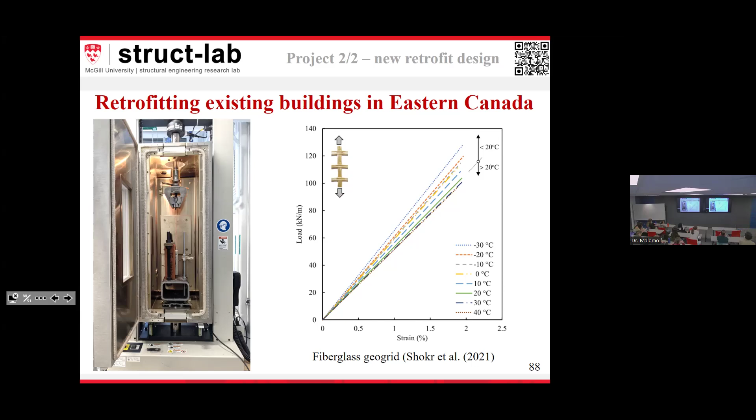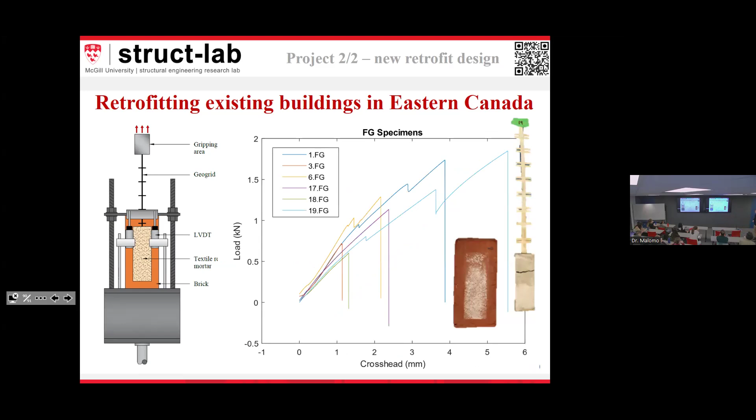Another example, right? So this would be our current setup in the environmental chamber: brick, mortar, and then you tension it under different types of loading. It breaks, so it's a lot of fun. It doesn't explode, but still, you'll see damage in there. And this is an example of fiberglass, which is a different fiber. So in general, this is all. It's a big overview in a very short time.